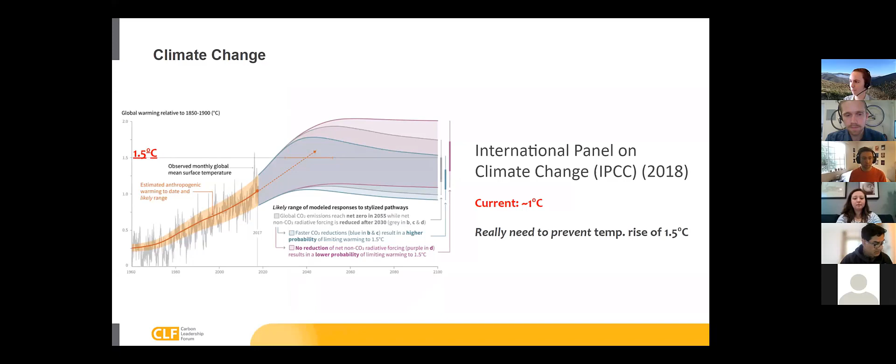I will give a very brief introduction to embodied carbon and LCA for anybody who's new. As we all know, I think we've all seen this graph — climate change, it's a problem, we're doing something about it. Everybody has heard this statistic over the years that building operations are responsible for 28% of global emissions, and that number has always fluctuated around 28-30%. The piece that a lot of people in the AEC industry are becoming increasingly aware of now is embodied emissions.

Building materials, the main core and shell materials, are responsible for about 11% of global emissions. And then we also have that 10% for other building material manufacturing, shown in yellow — those are the emissions happening up front when building products are being manufactured and buildings are being built. So if we add those two together, we are responsible for about half of carbon emissions.

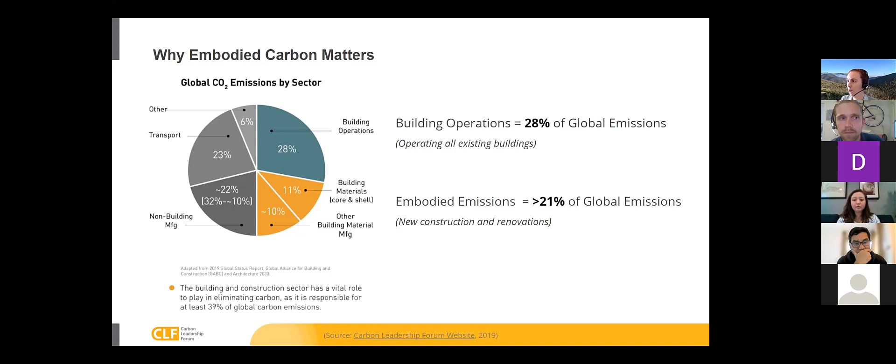So if we want to understand embodied versus operational carbon, there are many life cycle stages involved with constructing a building. Usually when we're talking about building energy use, operational carbon, and energy efficiency, that's just one small piece of the building's life cycle - that's operational emissions. Everything else, from extracting raw materials to transporting those to a factory, manufacturing something, and getting that onto the site - those are all embodied emissions, happening at the very beginning of a building's lifespan.

With the aggressive targets President Biden has announced today, it's really important that we as a building industry are addressing that stuff because it's happening now. The other piece is demolition and what happens to building materials at the end of their lives. So that's what we're talking about tracking here.

Kathleen's going to talk to you a little bit more about today. And I think at this point, I'll turn it over to Kathleen.

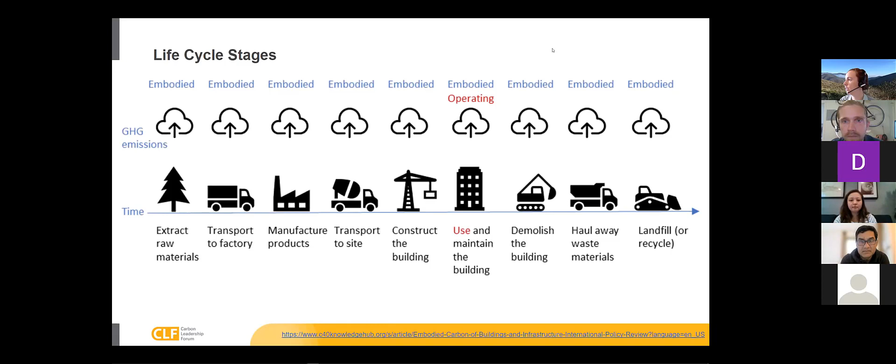Cool, thanks everybody. Can you hear me okay? Awesome, cool. Okay, let me share my screen. Let me share this - can you all see that? Does it say Happy Earth Day? Yep, yes it does. Okay cool, so Happy Earth Day.

I guess I should introduce myself. Hi, I'm Kathleen, I'm a senior sustainability engineer at Buro Happold. My background is in architectural engineering, so a pretty good place to be thinking about embodied carbon, both from a perspective as a mechanical engineer, the construction management side of things, and also as a structural engineer.

And I think that's really important, because a lot of times embodied carbon might only get pushed into one side of things - how operational carbon got pushed into the MEP side, or embodied carbon just gets put on the front door of the structural engineer. But really, it takes a village to make a sustainable project. So everybody has a role, regardless if you're working in interiors, you're an architect, you handle CA, or you're a construction worker, a manufacturing worker, someone starting a business. We all have a role.

But I think that's a really positive thing. Actually, I feel sometimes I can get a bit pessimistic about our industry, but it's 40% of the global CO2 emissions that are our sector. It's a sad thing, but it also shows that every day we wake up in the morning and we can do something really significant about climate change. So we should be excited by that, right?

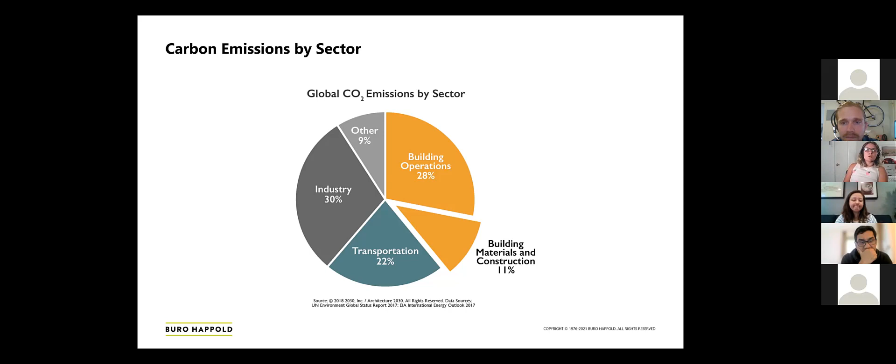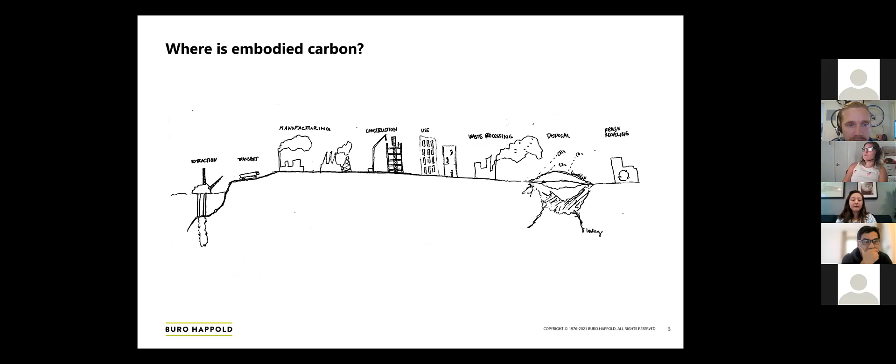But as construction folks, we can't just think about the pie chart. We also have to think about what form embodied carbon takes - it's the extraction, whether it's fracked oil or the coal used to power the facility. It's the facilities themselves and how they impact people, the construction workers, all through the end of life, like Laura was talking about. So it's really important for us to consider that, especially on Earth Day, right?

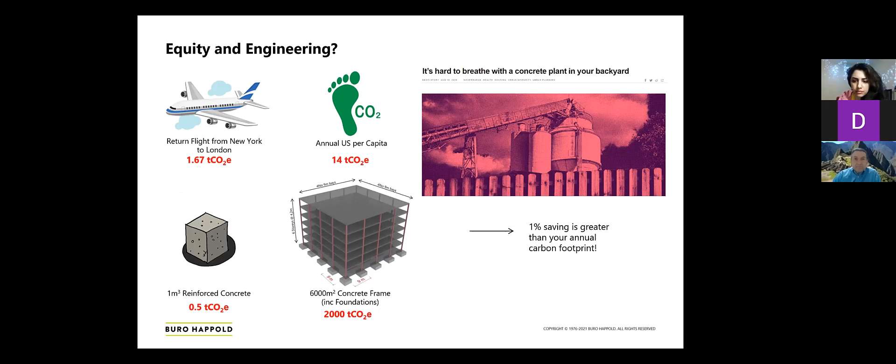I've been our company's diversity and inclusion co-chair for a while, and I think it's really important for us to get into our brains that every time we hear the word embodied carbon, it's important for hitting our global warming reduction goals, but it's also really important for public health, especially during the time of a pandemic, right, creating a lot of our high GWP materials.

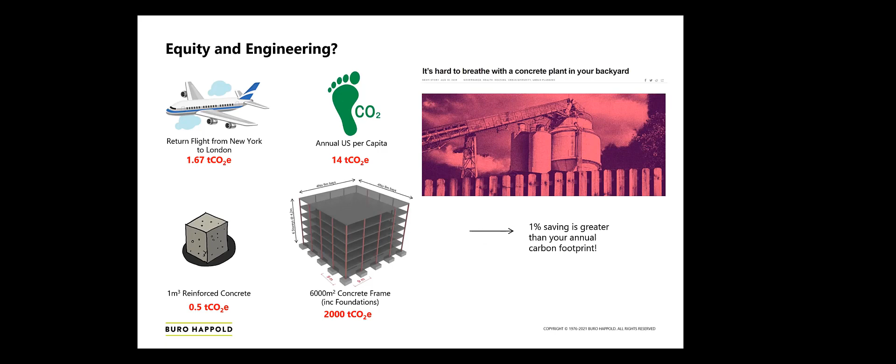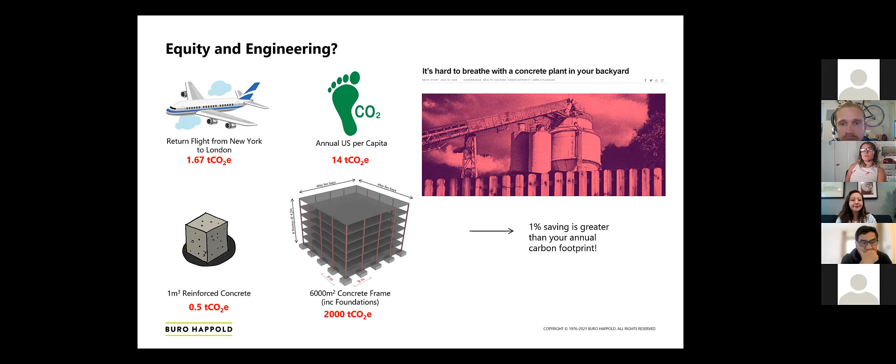It's not just carbon we're worried about - these materials tend to have lots of different pollution emissions that can interfere with fence line community health. So this is all to say, we're going to go over some technical tools, but keeping that in mind, embodied carbon isn't just an environmental thing, it's a human health issue as well, and contributes to lack of biodiversity. So all these cute little graphics are things we need to think about, and in reality, they're real environmental and human health distractions.

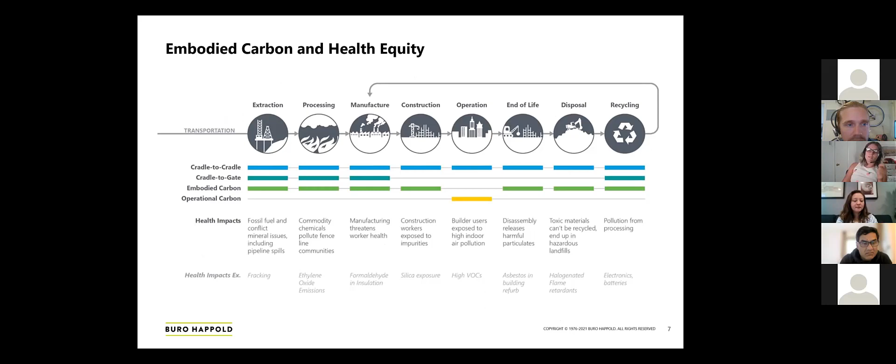So it's our responsibility, it's our job as engineers, designers, construction people to get the job done. And that doesn't just occur during the design phase. Just like Laura said, it's every different phase of the life cycle - it's our job to reduce operational carbon, embodied carbon, and these health impacts. So a little work for us up front goes a long way.

And typically, when you start talking about whole building life cycle assessment, you'll hear people talking about the A1 through A3 scope, which is kind of like the cradle to gate - that's really what it takes to put the power into manufacturing a material or product. What is that upfront carbon cost? What's the carbon associated with the diesel equipment to do all the earth moving and get the material installed? All of the B section is kind of that operational element.

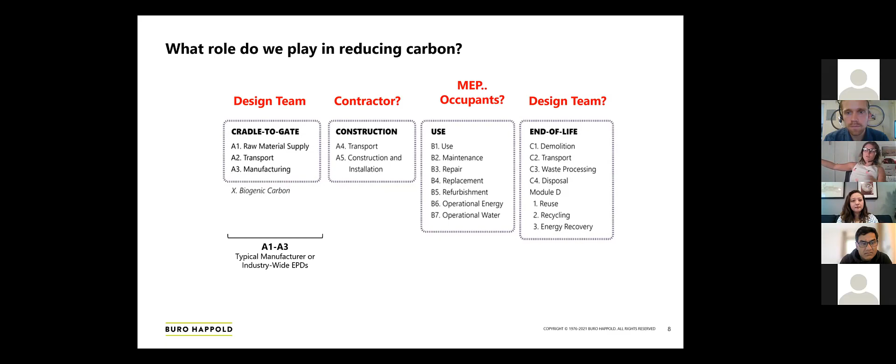And the end of life is, at the end of the day, what happens when a building owner wants to tear down a building and put in something shiny and new. All of these things emit carbon, and across the whole life cycle, we all can get involved. So in every single project, there's ways for us to make a difference and reduce embodied carbon. What I'm going to tell you about today is a quick case study combining a couple different projects to avoid looking too closely at one project.

Think of it as any project you're working on, whether it's a living building challenge project, affordable housing, maybe the latest headquarters for Facebook, or a school down the street. Hopefully this can apply to every project that you're working on.

So the project I want to talk to you about, let's say it's a 200,000 square foot building. We want to start out with the baseline, right? We think, okay, we can use Carbon Leadership Forum to establish a baseline for a big office building. We can look at our operational goals. We can take the EUI and the kg CO2e, which is kind of similar to EUI but for embodied carbon, and we can think about really how much carbon is in that one building.

And you can get some pretty big numbers pretty quickly. If you told me what this 40.8 million kg CO2 means, I wouldn't really be able to tell you. It's a big number, right? So this is what we're starting out with if we really don't work to reduce our operational carbon and to reduce our embodied carbon.

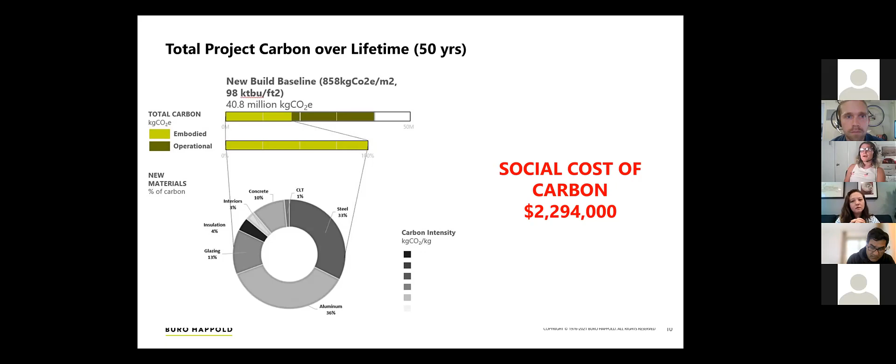If you also take a look at some of the news articles around the Biden administration, they just put, I think it's like $50 of social impact per ton of carbon. And so if you use that number, it comes out to around $2 million of negative impact from that amount of carbon. So these are all some metrics that you can think about when you're working on your projects to help your team, help the client you're working for, understand that these decisions have a big impact, right?

So what do we do in sustainability and engineering and construction? We put up some goals, right? All of these are different goals that you might think of, everything from electrifying your building to using good refrigerants, to trying to hit a 10% reduction of embodied carbon against your structural materials. Maybe you decide, hey, we're going to put a cap on how much embodied carbon we want to hit, and we've got to hit a number below that.

Maybe these are in line with your living building challenge goals and your LEED certification, and hopefully sometime in the near future, Cal Green will actually put some more stringent goals on us that require us to do embodied carbon every day. So I think this kind of sets the tone for what you might see on a project, right? That you've got a big amount of carbon to deal with, and maybe you can get the team to agree to some goals. Cool, right?

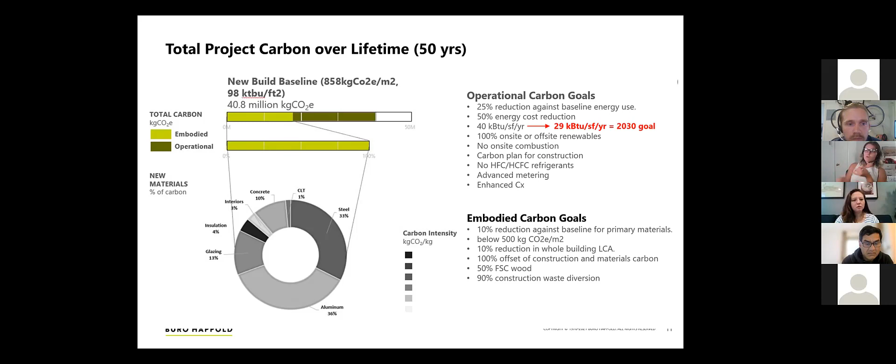So the next piece comes in - let's say you're at SD 50%, and you've got a Revit model in BIM360. What can I do with it? One important thing to consider is that Revit model has a lot of information in terms of geometries, volumes, even, if you're working with a really great team, materials information embedded in there. So what's really great about that is it should be pretty accurate per project.

You can push that down into different software like Tally, EC3, Beacon, or One Click LCA, and that can start to give you coordinated quantities to really get a good picture of how much embodied carbon you're thinking about. Another way of doing this, maybe if you're a contractor, is really using your construction takeoffs. It doesn't always have to come from Revit, so if you've got accurate numbers for putting costs together, that's another way to figure this out. But what's nice about Revit is hopefully it's pretty coordinated across the different design teams, and you can start pushing it into different software. So that's where I'm going to talk to you guys a little bit more.

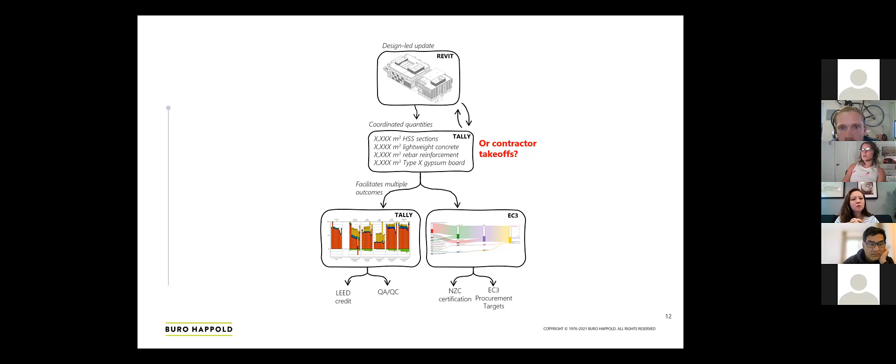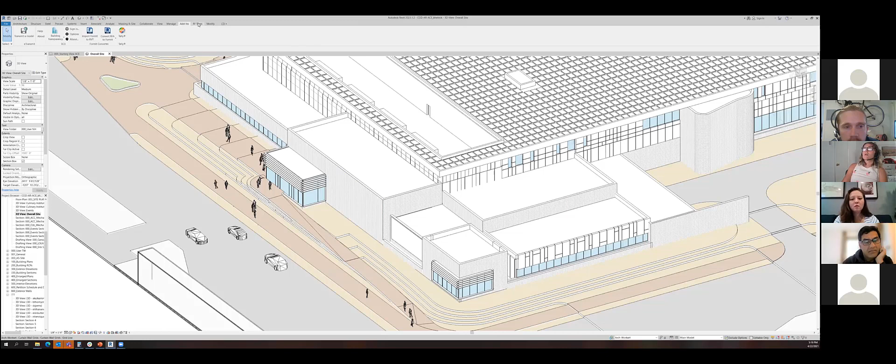So let's say today I'm just going to start and explain really quickly how you might use Tally. Tally is not for free, so you'd have to get a subscription, but the way it works is you have a Revit model, you go into Revit, you go into your add-ins, and you've already paid for Tally and downloaded it.

It'll take hopefully a quick job to just open it up. And I promise I'm only going to go really... While that's loading, Kathleen, there's... Yeah.

One quick question in the chat asking, how do you define your baseline for the case study?

Good question. It's not like ASHRAE 90.1 where there's a really good baseline. There's not really a body that's come together and said, this is what you must do for your baseline. Unfortunately, it's still a bit like the Wild West out there. So at least in terms of a third-party framework like LEED or Living Building or Zero Carbon Living Building Challenge certification, you're kind of up to making a baseline for yourself, using a Revit model maybe to show that you're not changing the geometry of the building in a serious way, or you're not comparing a concrete building to a steel building, if you know what I mean. So there's less of a baseline in terms of how we have a baseline for ASHRAE 90.1 modeling.

But another good way to look at baselines in terms of benchmarks is using the Carbon Leadership Forum, which has done a large study. I think Luke's company has also done a really good study of looking at numbers to benchmark things. So you can start there. Hopefully someone can throw those links in the chat for me. But hopefully that answers the question.

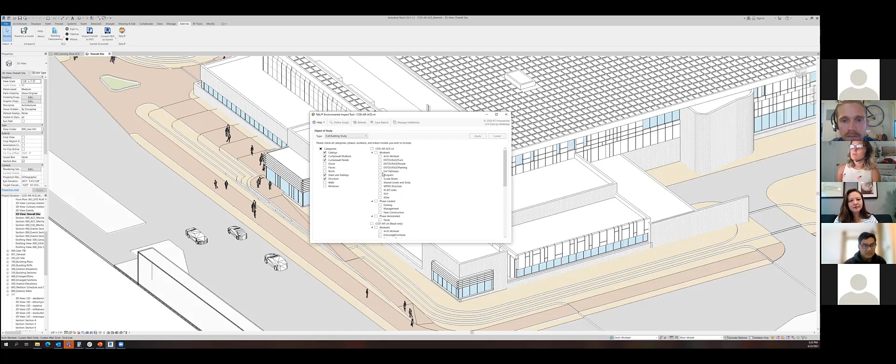The other thing that I think, coming from my background where I used to do a lot more Revit and BIM, it's really important to think about, crap in, crap out sort of. If you're working, whether it's your model or a model from another member of your design team, if the Revit data is not very good—if there's a lot of random noise in it, a lot of generic models, if things aren't very well labeled—you're going to have a really bad time, and you're going to spend a lot of time doing not much good for your project.

So one thing that I tend to work with is really asking architects and engineers, when they're working in their Revit models, to really think about creating—and this project I'm using as an example is a very early stage project, still in SDs—I ask, what work sets can I be using with my Revit? So I know which ones to be pulling from, and that really helps limit the noise.

You don't want to look at CAD links for embodied carbon—that's not going to help you. You really want to be thinking about how to limit the noise. So one concrete thing, if you're starting to get into this, is to ask people if they can create a work set just for your LCA. I doubt they will, but there's definitely a way to remove the furniture, remove the little people.

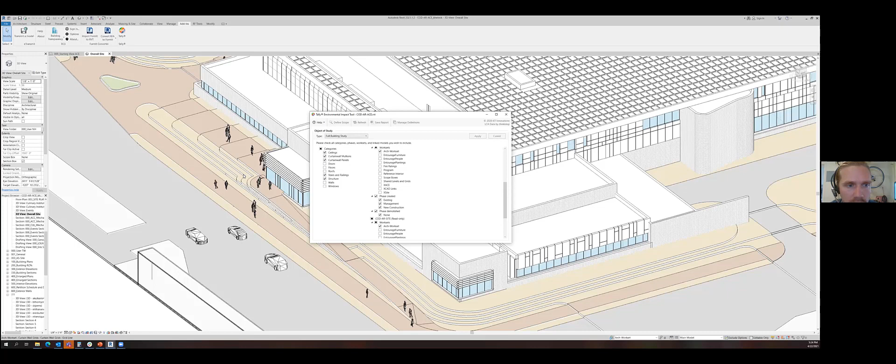Can you zoom in, Kathleen? Yeah, sorry, it might just be possible. Maybe it's not possible, but I'll take some photos, I'll take some snapshots.

But so that's one thing I'd really think about—when it's loading, LCA working with Revit is a great tool, but at the same time you have to think about what data you're working with and what data isn't going to give you results.

So let's say I clicked all the work sets I want, and it'll generate a quick overview, working through all of this. If this was a CD model, it would take a long time, but because a lot of this stuff is generic in an SD model, it's going to run through it pretty quickly.

And I think that tells you a lot about when you should consider working with a tool like Tally. In my opinion, doing LCA models, it's really difficult to get a good run out of an SD model unless you're working with a really sophisticated team on a quick schedule, because a lot of the time architects are still moving things around and the design isn't fleshed out. So think about the right tool for the purpose—whole building LCA is something you do close to the end of DD, or maybe you wait into CDs when you have more information.

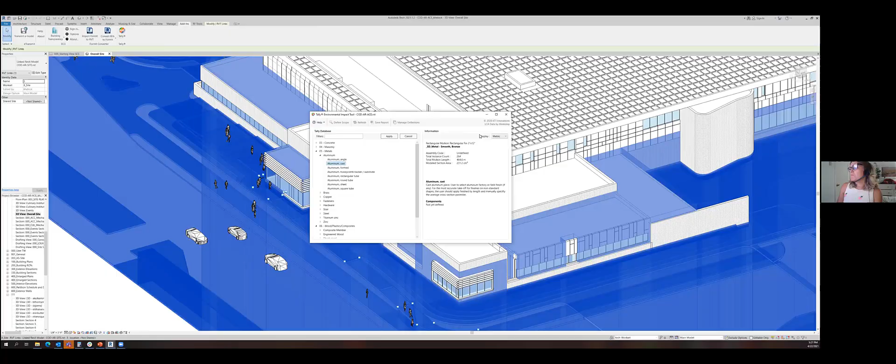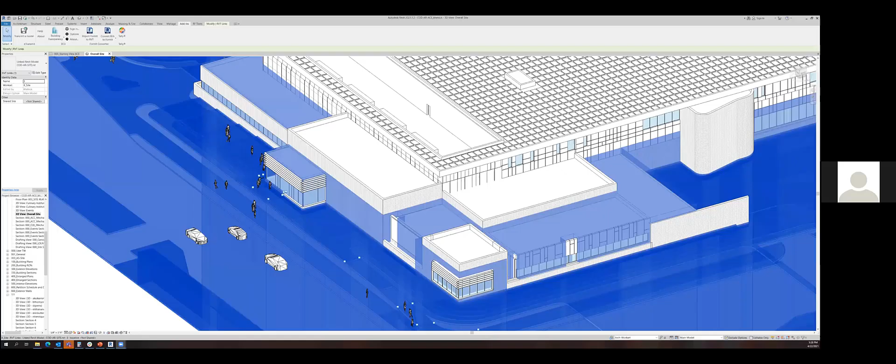We're still on. Looks like what happened—we lost our internet for a minute. Did we all lose our internet? Yeah, everything. I can hear you now. And Kathleen is moving, which is good. I think we're back, okay. Interesting, Zoom just had a brain fart, that's all. The chat wants to know what you're saying, Kathleen. You might be back on mute, Kathleen. I think everyone came back muted. Anyway, so sorry about that.

So when you go and do your report, it's going to tell you—one cool thing is that if you've done all that work with your Revit model, a really cool new feature is that you can throw that Revit model, if you've done all this work in Tally, into EC3 through this little button that I'll show you now when you go to Save Report.

Before we go to EC3, Kathleen, can I interject with one other question from the chat? Yeah—I'm going really fast, sorry. This pertains to Revit and how you're setting up materials and assemblies. Can you give some specifics on how you're setting that up—in families, or in particular how you set up materials and assemblies so that Tally tracks it correctly?

You got muted again somehow, sorry.

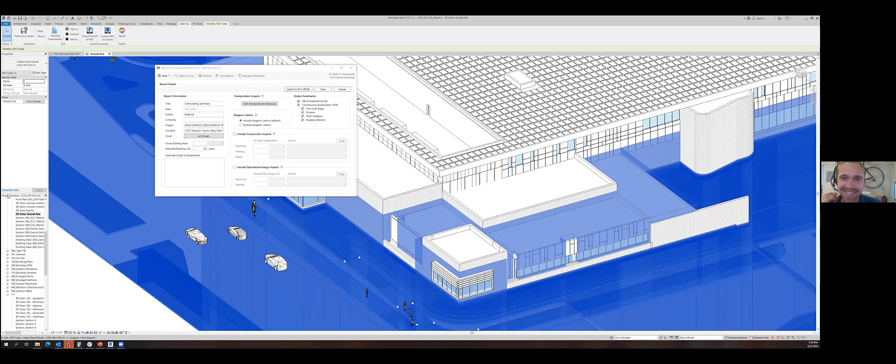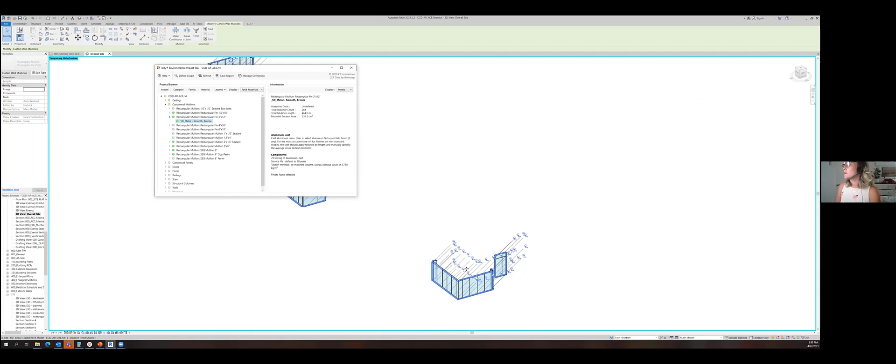So one thing you could think about is, let's say I'm in Tally—there's a cool feature where you can isolate the model in Revit, which is really nice. Make sure you have a 3D view open, and it'll highlight these mullions that I'm making up. Let's say I grab one—sorry, don't know how to zoom very well for my whole screen—but if you're an architect drawing the mullions, you go into edit type, and you can see the thicknesses; you want to make sure that's accurate.

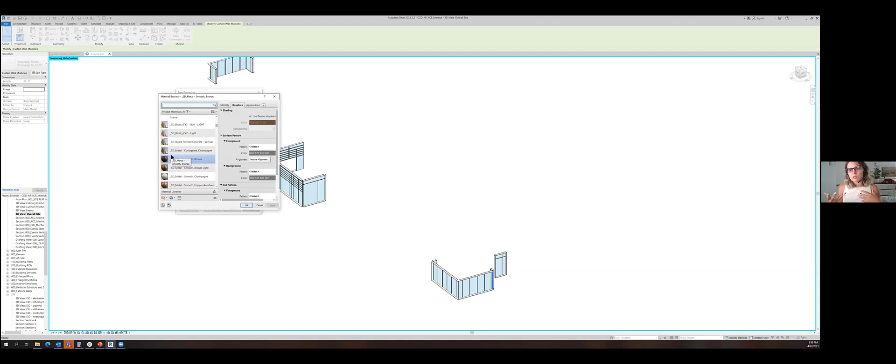You can change the actual materials in Revit, same thing for glass or gyp, even just labeling things. That's really to help the LCA modeler know what the designer's thinking. It doesn't have to be super specific, since a lot of that information you can look up in the specifications or a finish schedule. But to help out the poor LCA modeler who's got to do this for probably 2,000 different elements, labeling your families accurately is really helpful.

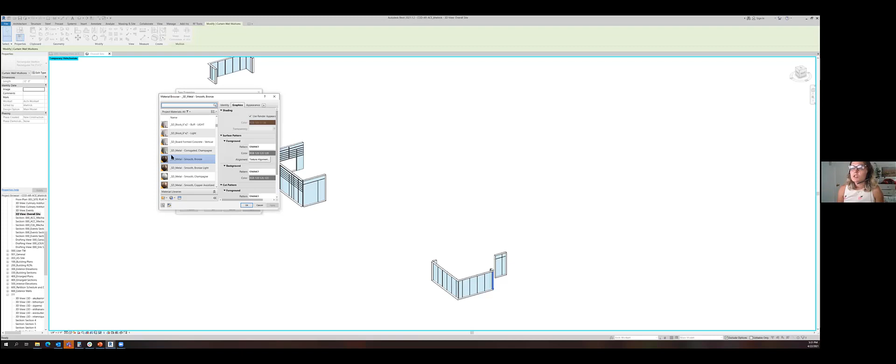So if you're an interior architect designing a wall assembly and you say it's type X gyp, and you've modeled it with the right inches of thickness, that really helps because that will get all picked up in Tally, right?

But then there's some things you don't model, like structural engineers - you're not going to model the rebar in your concrete. That's just something we'd handle in specifications, where it just says medium reinforcement or something. So some things can be coordinated in an email or an RFI. Some things, especially geometries, are really helpful to handle in Revit by calling out the name and being accurate. But obviously most people aren't going to do that in SD because it's a waste of time.

So that's kind of why I'm saying a tool like Tally might not be super useful in SD. Think about it maybe once you're moving into further stages of DD, when the team's getting stuff together. So that's my general advice.

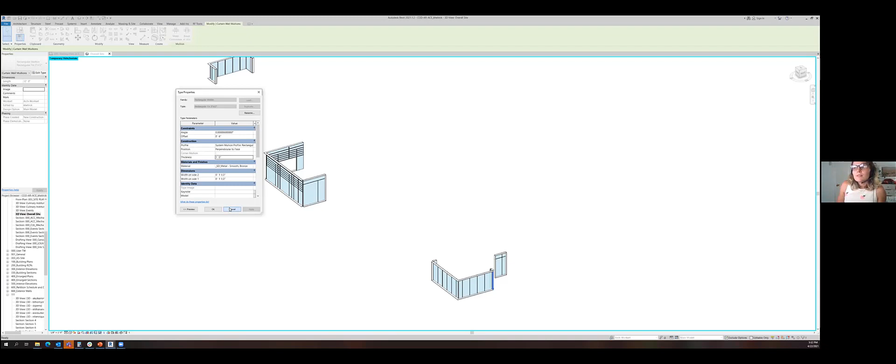One follow up there - it's pretty common to have, say, a concrete job with different concrete mixes. Is that something you usually define on your project, like 4,000 versus 6,000?

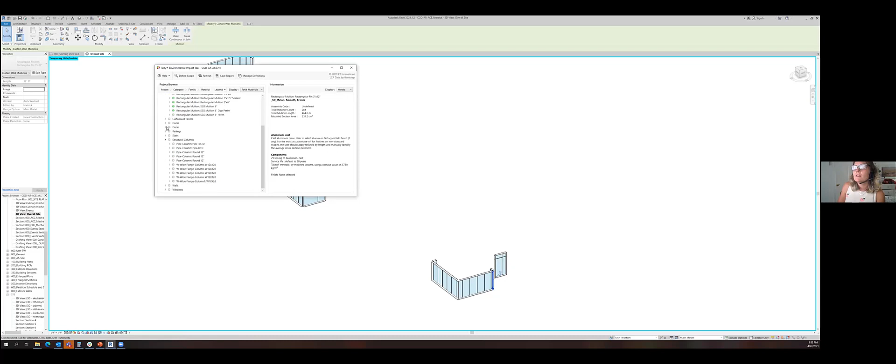Let's see if I can find it. So in this model, I don't know what generic 6 is - it could be anything, but structural concrete, that's probably some concrete. So in Tally, I'm going to go into the concrete cast-in-place, and then you can choose. Let's say it's a hefty slab, it's 6,000 PSI. Then I can go in and identify what the fly ash is, the slag.

So that information isn't going to necessarily be in your Revit model. That's going to live in the structural engineer's specs or their narrative, or could be in multiple places. So you're kind of pulling information just like an energy modeler would from all different types of places. But this is the stuff you should be thinking about with your team - okay, what's all the different information I have? How am I going to get it? How are we going to troubleshoot when things don't make sense? So a lot goes into just doing this part of embodied carbon, if that makes sense.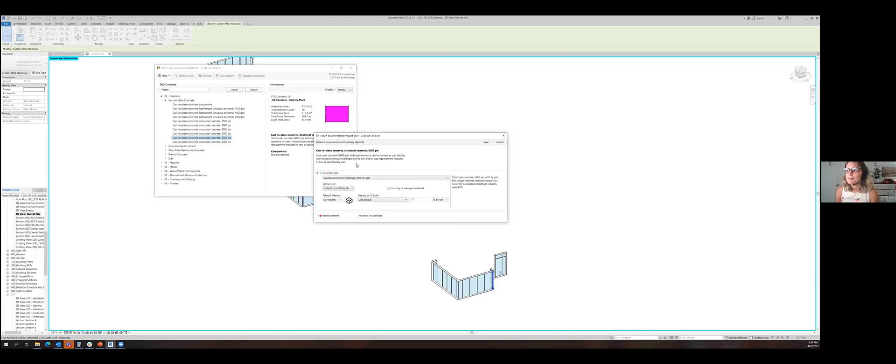Just to add a little bit onto that - in Tally, it's going to be based off of the Revit volume takeoff, or there's kind of three elements: by volume, by area, by length, and it's going to be responsive to what type of Revit component that is. So for something like the concrete example, it's going to be by volume, and then there's also an additional contextual element depending on what type of material it is.

So for example, for the concrete, rebar is kind of the contextual addition that you don't need to add within the Revit model - that's part of Tally, adding the rebar. Another example would be if you have a wall with wooden construction, you can choose to just have the linear value or the area of that wall, and then one of the contextual elements would be manually adding in Tally the stud spacing. So there's certain elements that only appear based on the need of different types of Revit components.

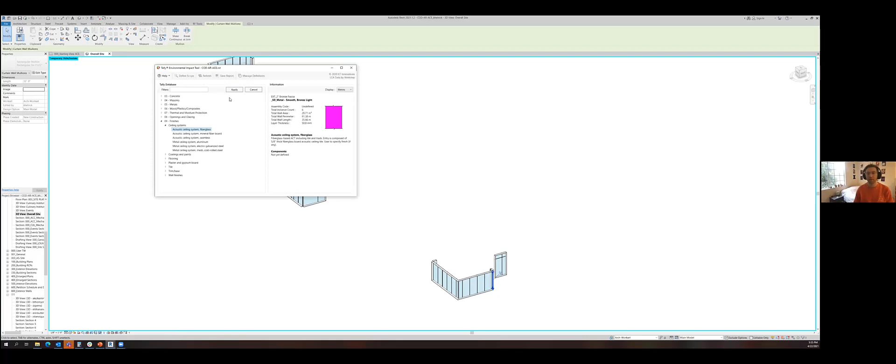Just quickly, I think something we'll frequently do is go by convention in the beginning in SD, and then as the project goes on, you can further develop that as you customize things and make decisions.

One question as we transition from Tally to EC3: do you need the material defined to map to EC3?

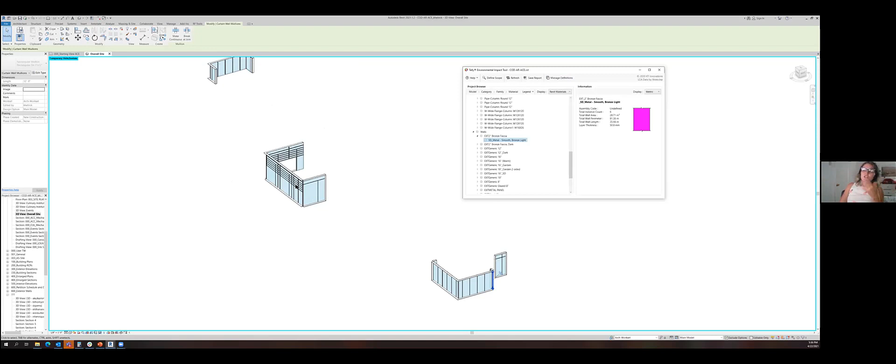I think one of the benefits of mapping to EC3 from Tally is that you've done a lot of that work already—sifted through the noise, applied different EPDs, applied different material aspects to your model. You've done a lot of that in Tally, and it's nice because you can check different elements within the 3D model and make sure, is this a curtain wall panel or actually more of a shading element, is that wood versus something else. That's really nice to do in Tally, but it's not the only way to work with EC3.

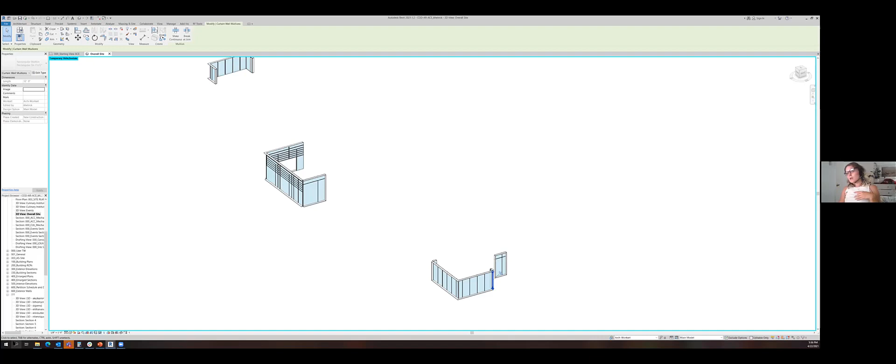That's just one route I'd recommend, maybe in the later stages of your projects: going directly from Revit into Tally. You can run your whole building analysis in there, create your documentation for LEED if you want to. But if you want to get really into the nitty gritty, you can export to EC3 and really get going. So I'm going to take you on a quick tour of EC3.

You go to type EC3 into Google, and it will come up with all this fun stuff about a wrestler. That's not what we're doing today, but it's just a fun part of your job—you get to learn about different wrestlers, also named EC3.

You go to Building Transparency, which is a tool, open source tool, which is really cool. You're going to log in—I'm going to log into my account—and then you're going to see a lot of different elements.

So I've zoomed into the tab on the left. There's a couple of different things to point out. The first is that you don't need to have a Revit model to just do a quick review of how different products might stack up.

I really love doing this at the beginning of my projects because maybe you don't have the budget, or maybe you don't have embodied carbon scope at all, but you want to look at how to reduce embodied carbon in your different materials. Let's say you're looking at insulation and want to do a quick, off-the-back-napkin analysis of blanket insulation. You can use EC3 to look at a different insulation, like maybe mineral wool, because that's what you've spec'd and you're only looking at wall insulation—but you can look at whatever you want.

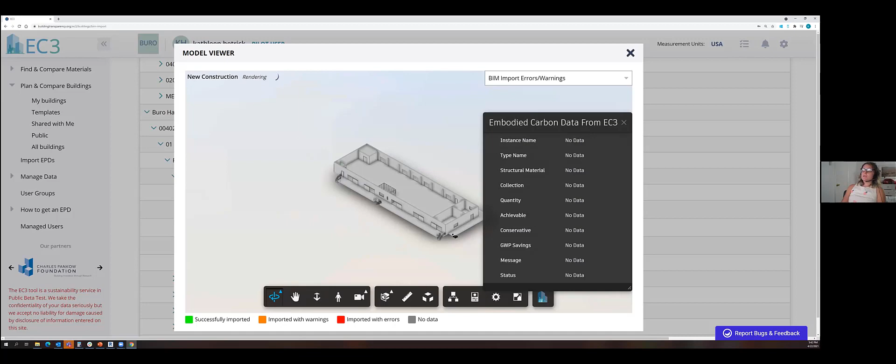So I usually use new construction, and you can open up your BIM report in 3D, and I'll give you a picture of the model. This is a very simple project in really early design stages, so there's not much in there, but you can see - wow, stuff's been brought in, that's cool. And you can also see some stuff hasn't been brought in because it doesn't know what it is, like that's probably a generic floor, so it's like, I don't know what this is.

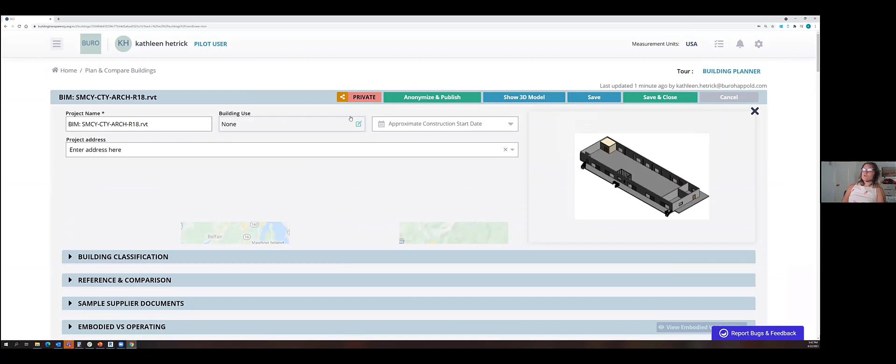So then you can go back to My Buildings and you'll see that this project has been brought in from BIM360, and this is where you're going to go in and mess around with it. Let's say all of these numbers don't make sense for the project - just pretend that they're all accurate, but they aren't for this particular project.

Say it's a lodging - what's great about EC3 is that it's going to quickly give you some baseline numbers based off of what information it's pulling. So unlike Tally, where you've gone in and double checked things and gut checked them against the model, there's not a really good way of looking at the 3D model to go in and double check. It's just bringing in what it can. It's less helpful for really being able to know for sure what you're doing if you're doing it this way, but you can see some stuff's being brought in successfully, right?

Like CMUs, metal studs - and if you're working on the project, hopefully the things are working, but you might get some crazy stuff you don't really expect, like the barn door, which is going to be really difficult. It's bringing in noise, right?

So one thing that I always recommend checking is you can go to this BIM report as a CSV, and that will show you what's been brought in and what hasn't been brought in.

You can also start playing around with - EC3 makes some really nice summary charts for you. Maybe you want to show, we'll look at a more complicated building, but you can start to show what's your biggest components by mass. So that can help you understand, wow, what is the stuff that we really need to be focusing on.

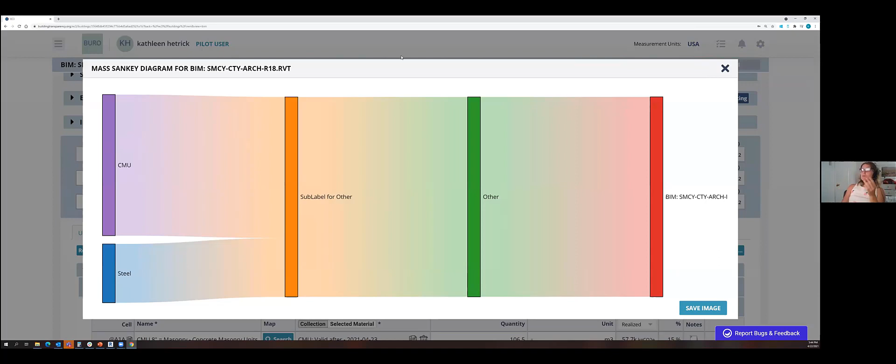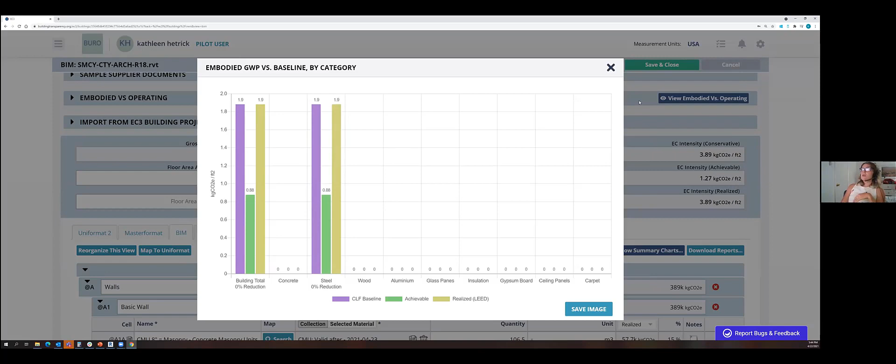They've also got some cool Sankey diagrams, like bar charts that can show, once you start applying EPDs, how you're getting savings. I'm not going to get too far into this, but that's just the tool to bring data in directly from BIM360, bringing it into EC3.

But what I wanted to show you is the project that I've made public for y'all to play around with, which is the CLF LA example. So let's pretend it's a project in Olympia, Washington. This is a project that I've been working on, where we brought the project in from Revit. I worked on it in Tally with the architect, the structural engineer, and the interior designer. And then I pushed it into EC3, and then I started applying real EPDs that I had confirmed with the construction team.

Hey, quick question, Kathleen. Yeah. So I am in my own EC3 account - how do I find your building that you've made public?

Thank you. Kathleen is muted again.

Sorry, yeah, so go into public and this model will be in there. You can even destroy stuff, it is what it is I guess. It's not like, it's just a good learning tool, but there's other public projects in there too.

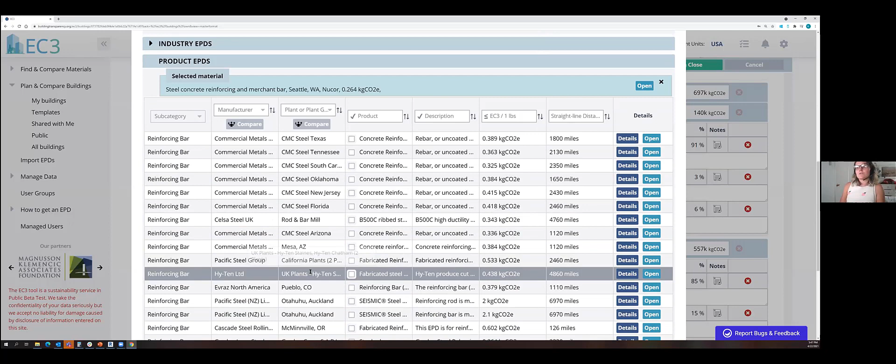And then what's really cool about EPD or EC3 that I love is that you'll get that information in, and then you can actually choose which EPD you're using. There's 67 different types of EPDs for structural rebar, and I'm using a very specific Nucor rebar based out of Seattle that's been chosen for recycled content.

This lowers the embodied carbon, and it's used with a sustainable process that's less energy intensive than like blast arc furnace. So we've gone and made that decision as a team that we're going to source from that manufacturer, from that plant, to reduce embodied carbon.

And I can select this EPD. The EPD is kind of linked into the EC3 tool, so you can download it, you can read about it, you can see that there's a large amount of uncertainty with these. So these aren't exact science, it's giving a ballpark number because this is what's been provided by the manufacturer. It has been third-party reviewed, but embodied carbon I still think is a bit more of an art than a science.

So you'll see all the information in there. You can double check the EPD and see what's going into the manufacturing of this particular type of concrete reinforcing. And then that's going to give you an exact carbon amount that gets applied across your project, right?

It's pretty simple. What's the EPD factor? Multiply it by the pounds of rebar, you get a number. That's basically what we're doing, we're applying EPDs, specific EPDs.

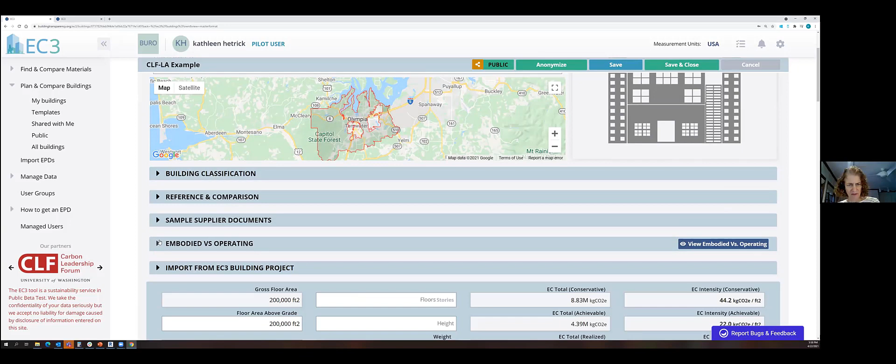Where on the tool were you able to show the graph of embodied and operational carbon? So when you're in a project, it'll be within one of these little tabs, embodied versus operational. Through a lot of trial and error, I found that things like the graphics won't show up, all these cute little summary charts, until you fill in the building use. Make sure you put in the square footage, your typology, and your address, because otherwise it just won't show up. For months I didn't even realize it was an option. You don't need to put in stuff like floor stories and height. But yeah, the embodied carbon and operating carbon lives in here, so you can play around with different EUIs and different mixes of gas and electricity. This is really helpful, I think, for clients when you're trying to push them toward electrification, because they're like, oh gosh, I don't want to be on gas.

And where did you pull up, where did you generate that chart showing both the embodied and the operational carbon? This one. Oh, there you go. Cool, nice, thank you.

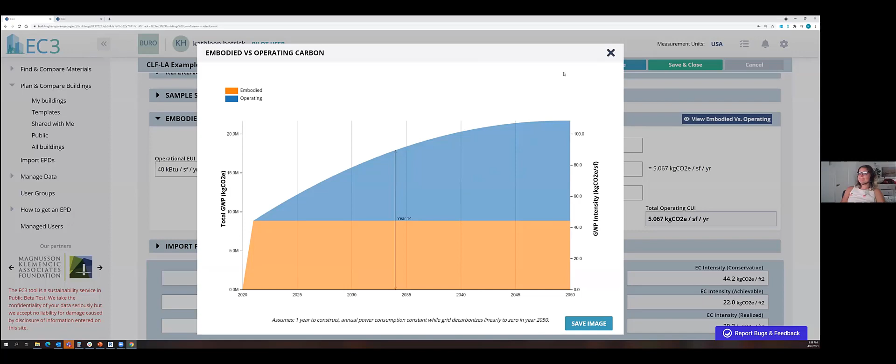So I have a practical follow-up. At the beginning, when you first started importing from BIM360, you said your firm has to install the plugin. Does that have to be done through the firm's BIM360, like at a corporate level? Oh, you're muted, sorry. So I'll drop this into the chat. This took me a long time to figure out.

Yeah, asking for a friend. So you can kind of get your BIM guru to help you with this, I had to have mine help. They have the master BIM360 account, and there are different apps in BIM360. If you want to make sure you can do this on your end, I'll share in the Slack a boilerplate email that I sent to architects to make sure they've done it too, because then they'll tell their BIM guru and everything will work.

And I would say there's a really nice feature in EC3 called report bugs and feedback. For me, I was trying to import a project recently and for whatever reason it wouldn't import, and I still don't know why. You can just send a little user snap in your email and say, please help me, I'm distraught, I can't do this and I have a deadline. You can be like, I don't know what this is or whatever, and they'll get back to you really quick. They're really lovely people.

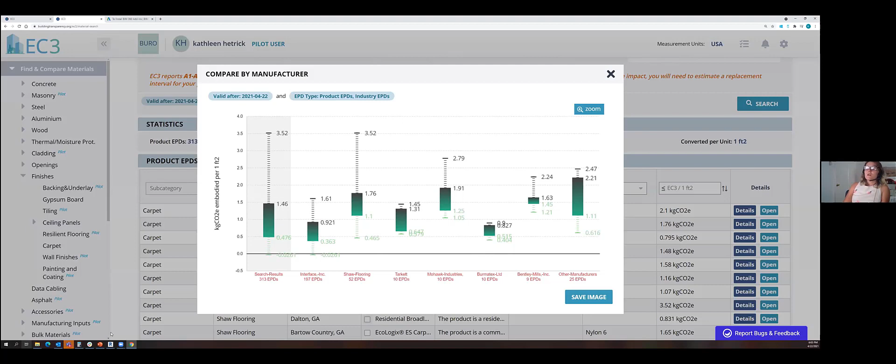Even though insulation, gyp, ceiling panels, and carpet are small compared to my project, they're on every building, so they just add up. Every interiors project, that stuff adds up, right? Every existing building. So even if it's small in your project, in the grand scheme of things, we really need the market to change. Maybe you couldn't get cross laminated timber on your project, but you could still go for the best carpet.

So I just think it's a hopeful feeling, knowing that at any stage in the project there are nice tools you can use, whether you're doing a whole building LCA using Tally or just looking at manufacturers and cleaning up their specs. We can have a big impact for this particular project.

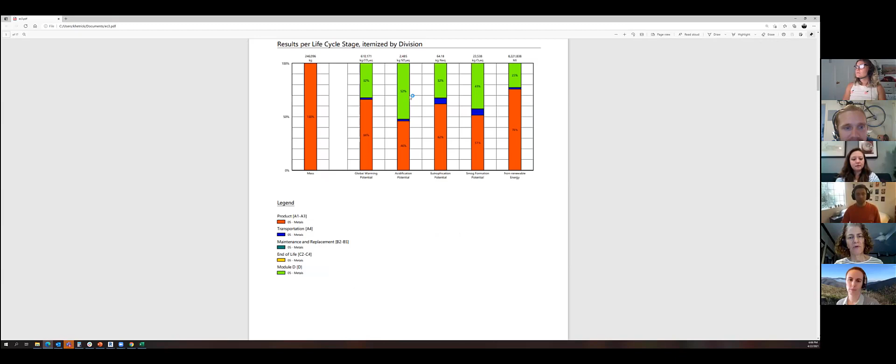Well, EPDs include all those 6 categories that you alluded to — 5, 6 — but EC3 is only the carbon. Gotcha. But if you dig into what's cool about EC3, you can dig into all those EPDs. They have them, all those EPDs — too many letters — they will have all the data drawn from a real EPD, so you can find those different categories. But it will not be comparing anything but carbon.

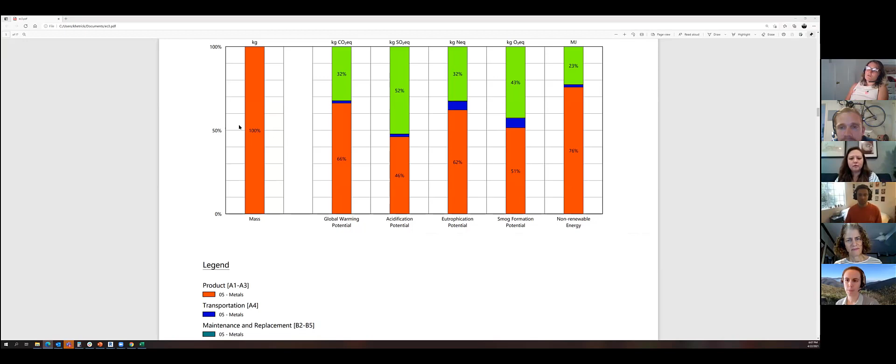Jill's totally right, I think they're trying to build out the other 6 impacts within EC3, because every EPD has those 6 impacts accounted for. But I think just to make things simple for their user interface and for their team, they've only looked at GWP. When you use Tally, it'll tell you all the different other impacts, and they're important, right? Like our oceans shouldn't — we don't want our oceans to acidify, and smog's terrible. So they're important things to look at too.

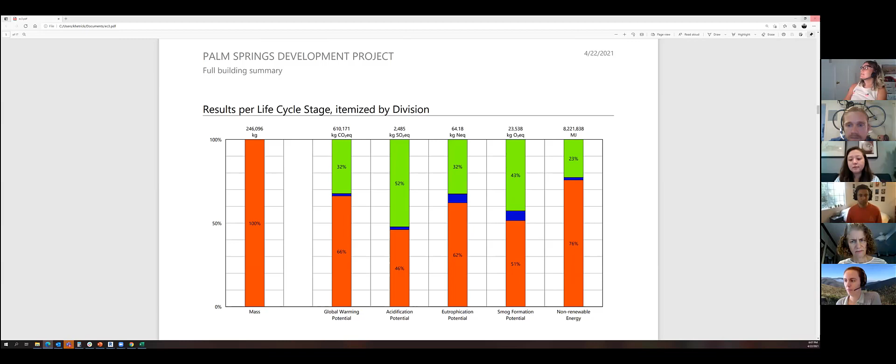Tally does that currently, but you could do it in Excel. You can grab a bunch of EPDs and make a little chart and grab that data out of an EPD. That's basically how EC3 is working — it's just grabbing that data out of EPDs and applying it across. So I think carbon may be kind of the granddaddy of them all, in that high carbon you're going to have...

It doesn't seem to be directly correlated, and I guess we'd have to look at a couple of EPDs, but too much carbon in the atmosphere creates acidification of the oceans and smog, and it has a lot of impacts. So I don't know if you would have a high carbon emitting material with low acidic impact. I don't know how they measure those environmental impacts. That definitely gets into the weeds of the EPD.

One thing we've noticed with glulam and mass timber is that you tend to get high eutrophication because of the fertilizer and stuff. It's not the same ballpark as concrete and GWP, but it's something we should look at the evidence and say to our CLT manufacturers, hey, how do we reduce this impact on the environment? I think that's a cool thing too.

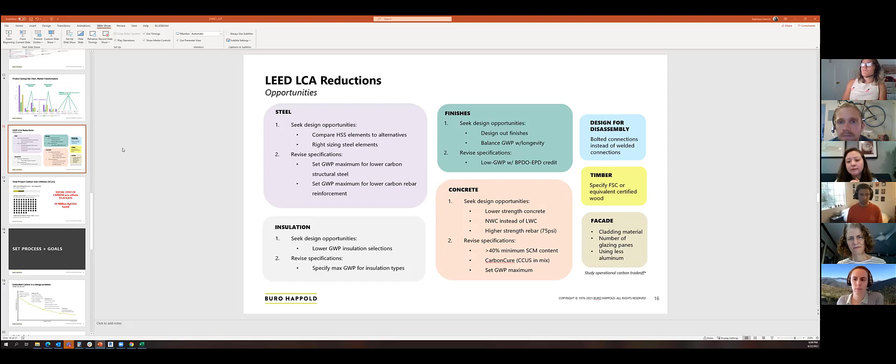It's the power of looking at the data up front, because you'll be like, whoa, why is the eutrophication on my project higher? And then you're like, oh, maybe the carpet has a certain, you can look at that EPD and say, wow, that carpet has a pretty high eutrophication or ozone depletion potential. So some things might be surprising, and there's no perfect product, I guess, but I think even most of the bio-based materials are going to be the way to go, for sure.

The challenge is not to get too lost in the weeds that you give up. Start somewhere. And I would say one of the things that's really helped us is to attend the BIM kickoff, especially if you're thinking about doing a whole building LCA.

Talk about work sets with people and ask about their naming conventions and figure out what level of detail you're going to get to in their Revit model. A lot for us as consultants or engineers, our time is money for a project, so if we want to get a bang for our buck, how can we make sure we're not spinning our wheels, to Jill's point, getting lost in the details? How can we make sure that our models are in really good shape?

Once we bring them into Tally or bring them into EC3, that can really save time and prevent a lot of headaches, so that we can get to the embodied carbon savings portion of it. Or, if embodied carbon analysis isn't for you, you can look at the EPDs and make improvements there. It's not the only tool that we have in our toolbox.

This is so great, Kathleen, really important information. I feel like we'll have to have this sort of LCA workshop type thing a few times a year, just to come up with more questions and look at more tools. There's a lot we can dive into, and I think that could be a good thing for this group to do, or have one of the working groups tackle.